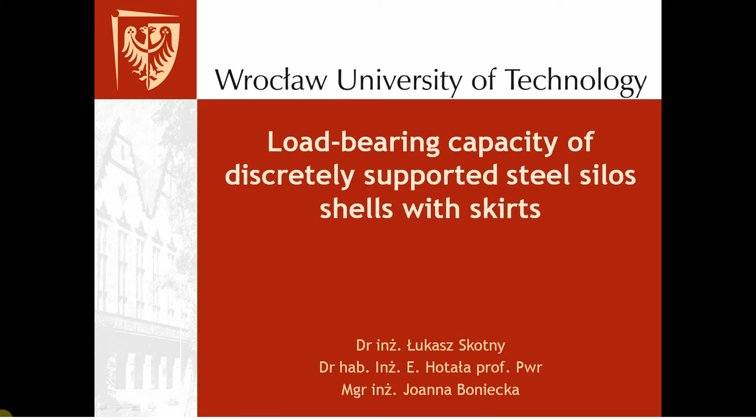This presentation was shown at the International Conference on Metal Structures ICMS 2016 and is about load capacity of silos that are supported discretely with skirts. If you are not familiar with terminology, in each silo there is a place where a vertical shell connects with the conical hopper, and this is a hopper junction.

And if you extend the silo shell below this point, or this line if you will, you get a skirt. And usually skirts are created simply to avoid collisions between the silo structure and supporting structure. As you can see here, if the skirt would be shorter, then the hopper would be lower, which means that its diameter on the level of the first horizontal beams will be bigger, causing a collision, so the skirt must have a certain height in this example.

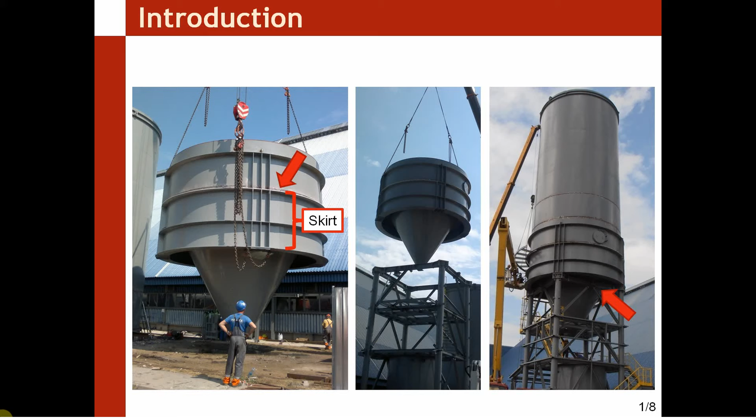Also here you can see two silos that actually have skirts, which is quite hard to see from the outside, of course. And the topic of this presentation appeared because Eurocode, which is widely used in silo design around the world, states that if you use a skirt which is thick enough, actually at least 20% thicker than the silo shell, then you can calculate the silo as if it is uniformly supported.

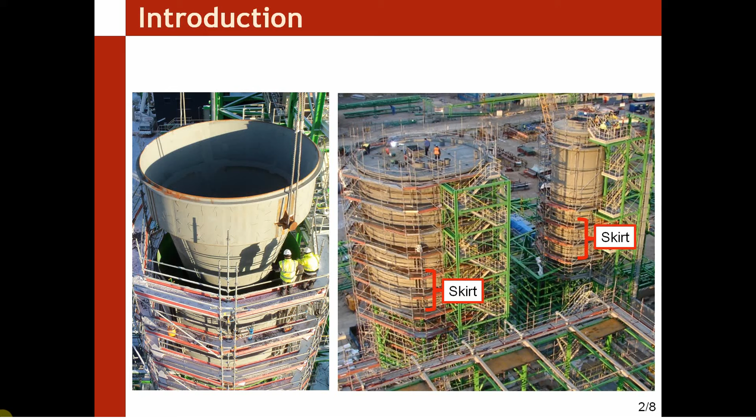And since I designed every silo I have shown you here, I had the stress distributions in those silos, and I knew that they actually are not uniform, that the stress is non-uniformly distributed along the circumference, which means that the shell is not uniformly supported. So, with Professor Hotała and Asia Boniecka, we decided to make several calculations for one silo with the parameters listed here, simply to see how exactly the skirt influences the silo capacity.

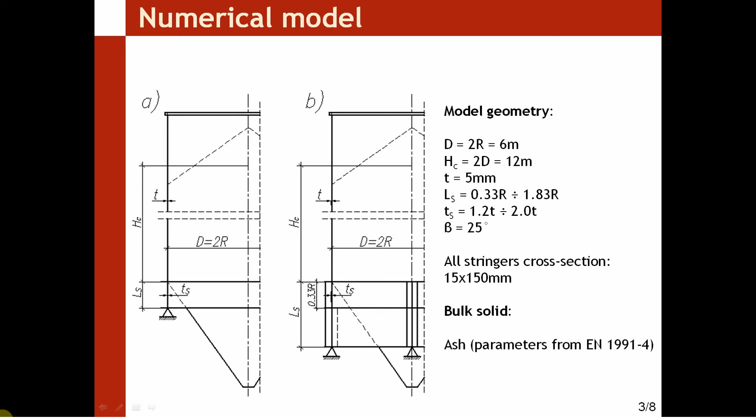And there are many parameters, of course, but for you to understand what I will be talking about, please note that each model we have created has a name which consists of two values. The first one, S, stands for skirt, and basically the higher the number, the higher the skirt. And the second one, V, stands for version, and the higher the number, the thicker the skirt. And also we've made an S1 model which was actually uniformly supported, so we have a value to compare to.

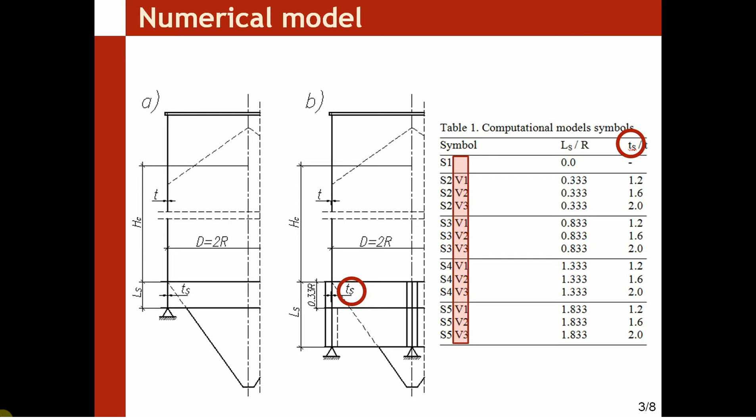Here you can see that if we use a model with a relatively short skirt, its capacity is actually much lower than the capacity of a silo uniformly supported on the entire circumference. And in each and every slide you will see the reference values for the uniformly supported silos are given in gray fields, and below, for various types of models, capacities are given in certain cases. And you can see at the bottom of the slide that the capacity of the silo shell is actually almost 40% lower.

Even though you fulfill the criteria of Eurocode, still the capacity is much smaller than the norm would suggest. There is one point, however, that I need to mention, and that is the vertical stiffeners over the column. You can see them under the primary buckle in the picture on the left. Those vertical stiffeners actually cause a certain concentration of stresses, which leads to a situation that the stress distribution is not uniform.

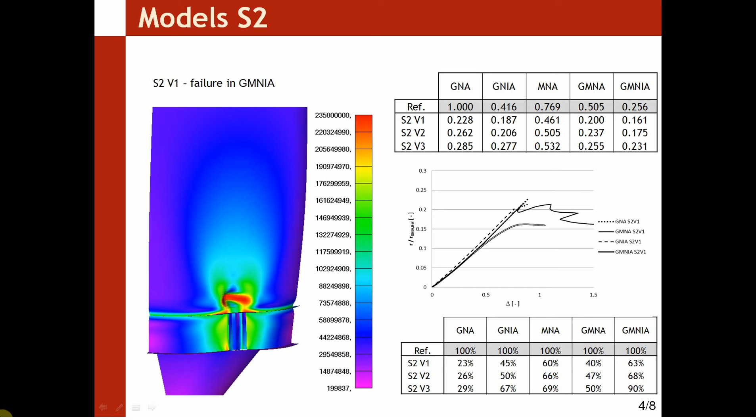The first models actually showed what we had to show, but since we are curious in nature, we've created more models with even higher skirts, and we found out a few interesting things. The first one was described already in 2007 in the PhD thesis of Cornelia Doerich, and that is the phenomenon that appeared in our models with medium length skirt.

If you perform a geometrically nonlinear analysis, you will notice a certain drop of load on the capacity curve, which is correlated with the first buckle that appears.

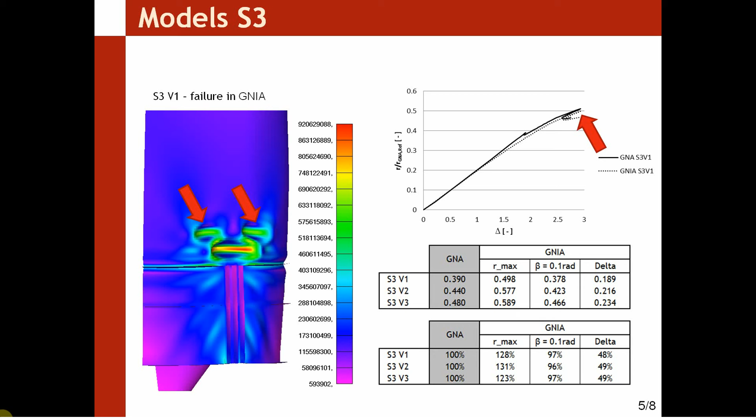Unfortunately, in structures like silos, this rarely plays any role, as you can see that with imperfections, the value obtained from analysis with this beta, the angle equal to 0.1 radians, is actually almost the same as in analysis without imperfections. And it is obvious that imperfections have influence on the capacity. So a workaround method had to be described, and my proposal is like that, to measure those radial deformations.

And here you can see the capacity comparison between the models with a medium length skirt and the one that is uniformly supported on the entire circumference, and still you can see that if you use the criteria I have described, the capacity is lower still, up to the point that it's actually 30% lower if you use only a bit thicker skirt than the silo shell, which is usually the case.

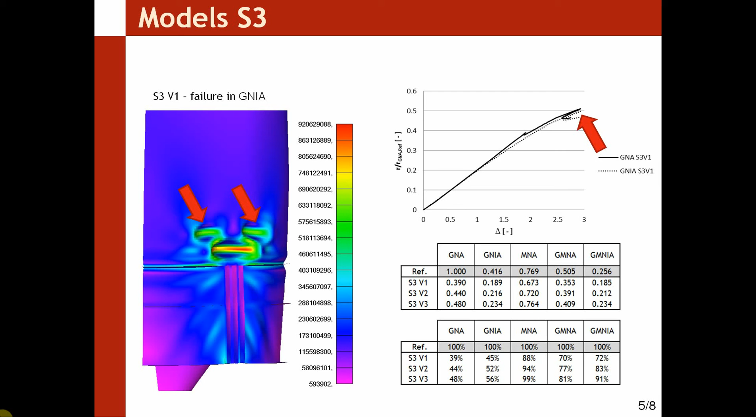So we went even further with that, and we've discovered something even more interesting. We've noticed that if you measure the drop in capacity correlated with first buckle forming, in models with relatively short skirt, the drop is quite big. But as the skirt gets longer and longer, the drop on capacity curve is actually getting quite small, up to a point where it completely disappears.

Which means that there are instances where primary buckle forms and there is no drop on capacity curve whatsoever, even in analysis without imperfections. This means that my proposal works for many models, but in some cases it's simply too little. And currently in my university we are working on an idea how to somehow describe the allowed deformations to deal with the problem. Because as an engineer I strongly believe that forming of this first buckle should be treated as capacity limit. And we need to describe somehow when to consider that the buckle actually formed.

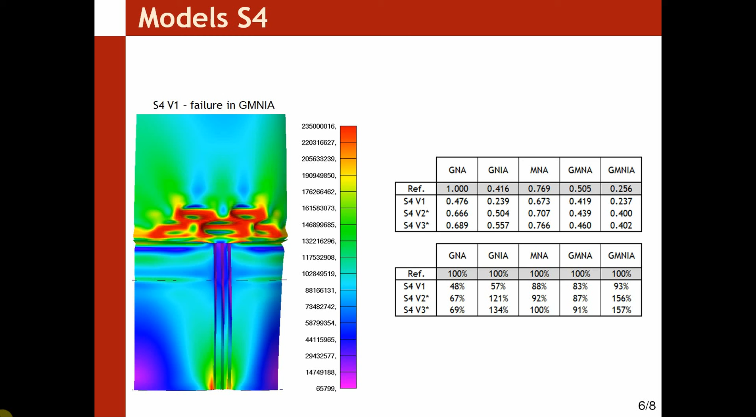To sum this up, I would say that if you are designing a silo, you should be very aware and very precise about when to treat your shell as uniformly supported. Basically, the code states that if you are using a skirt and it's 20% thicker than the silo shell, it's okay, but reality shows that it's not always the case, and I advise certain caution when it comes to this. Also, I think that if you are using a silo that actually has a skirt to the ground, this is a textbook example of uniform support.

I would still be cautious because you most likely have to cut a hole in the skirt simply to install a gate, or at least a hole for a conveying machine or however you wish to discharge your silo. And those holes actually have a very strong influence on shell capacity because there will be strengthening on the edges of the hole, so on the edges of the gate, for instance, and this strengthening will be stiffer than the shell itself in that region, of course, because this will be like a hot rolled profile, for instance, or something welded there.

And this would cause a stress concentration, exactly the same as the stress concentration in the vertical stiffeners over the column in the examples I have shown you, which leads in turn to a situation when a silo can lose local stability over edges of the gates. So this should be very carefully considered when designing a silo. Also, I think that additional criteria for shell failure are needed.

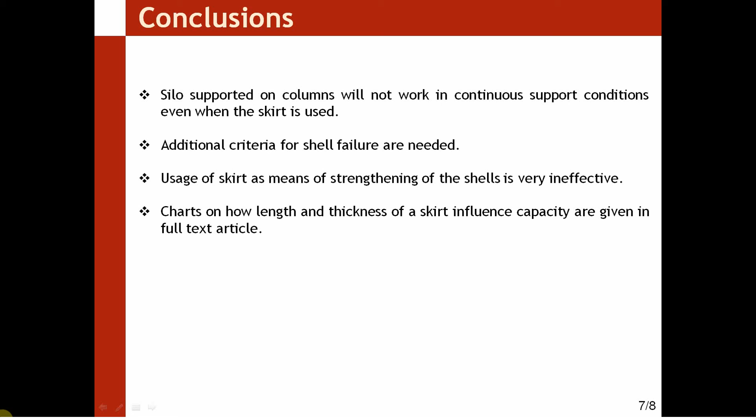And if you are interested in how exactly a skirt influences the capacity of the shell, there is a full text article that was printed in Proceedings for International Conference on Metal Structures, ICMS 2016. There is a book with abstracts, and also the book contains a CD-ROM disk with full versions of articles, and there we have given all the information about the design we have created. Thank you for your attention, and as always, have a nice day.